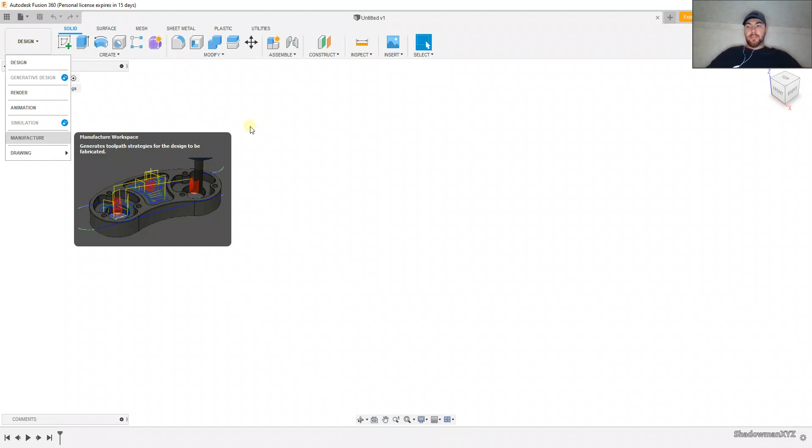If you have no experience whatsoever with Fusion, watch the other tutorials and then come back and start here on the third. So the first two videos we discussed designs, sketches, renders, and drawings, and now we're going to discuss manufacture. So in order to manufacture a part, we first need a part. So let's make a part real quick.

Sketch, top, look down at it. If you don't like the color here, I think we discussed this in the last video, you can change it in environment, change the color. That's better for you. I'm going to go ahead and set it back to photo booth. Okay, we're going to hit C for circle. We're going to draw a part real quick.

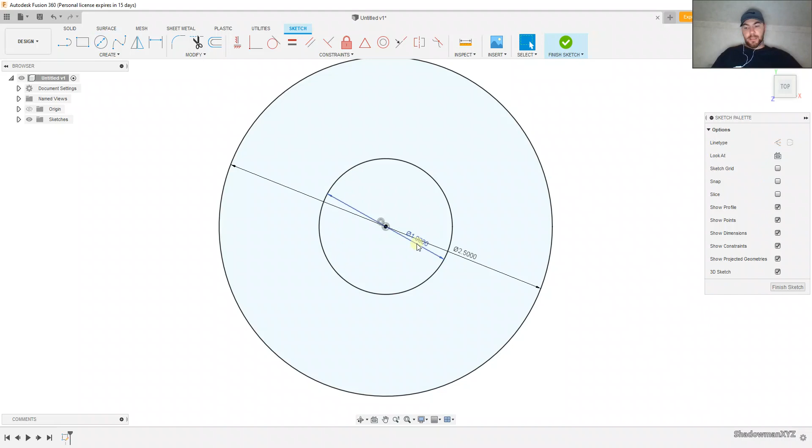So let's say 1 inch. Okay, and then let's make that 2.5 inches. Okay, we're going to make another circle in the middle of it. We're going to call that 1 inch. Okay, and then another circle in the middle of that. We're going to call that 0.25. Okay, and then another circle, which is going to be the bolt circle. And we'll set it at 1.750.

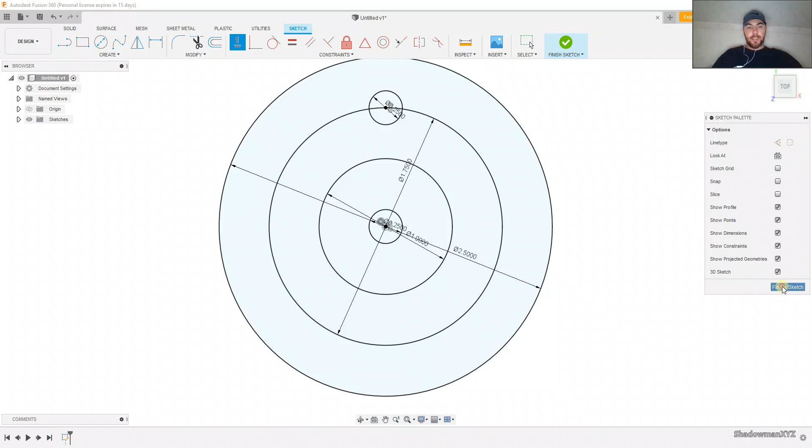Looking good. We're going to create a circle up here. It's going to be 1/4 inch. Okay, we're going to constrain it here. Vertical. Okay, looking great. So we have our part done now. Now let's do some extrude.

Q for extrude. I'm going to touch every single surface except for the center. We're going to leave the center an open bore. We're going to pull this up by 0.125. Okay, a little disc. Turn the body off. Turn the sketches on. Okay, and we're going to extrude everything else up with it. Q for extrude. Except the middle bore. Turn the body back on. We're going to go 0.25.

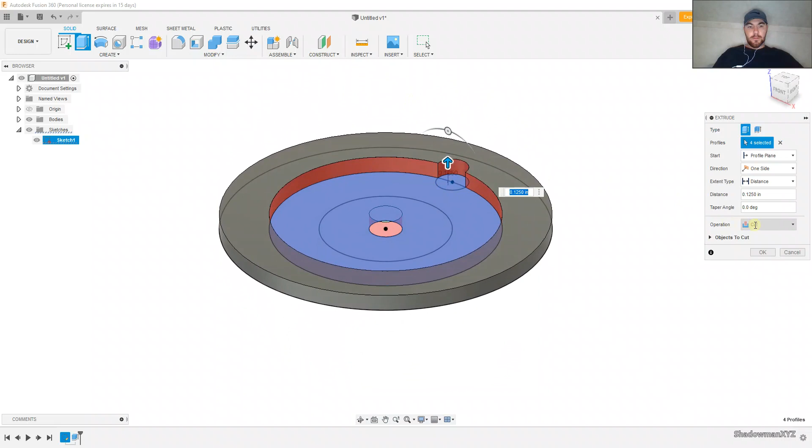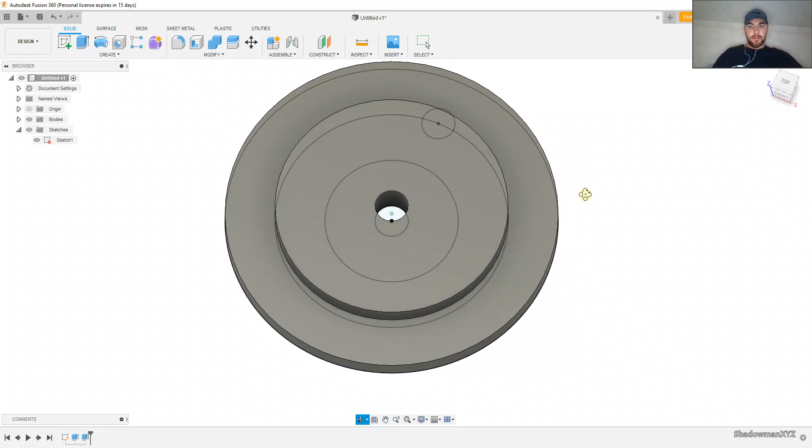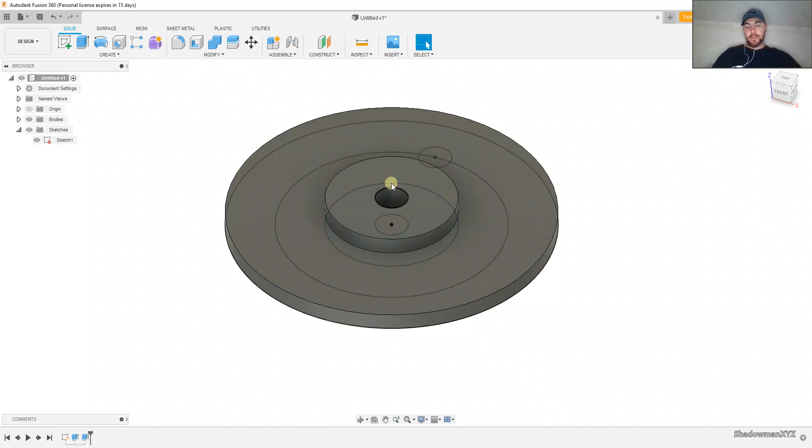Okay. And you know what? We're actually going to turn join, oh 0.25. Okay. Let's see. Let's edit that. Let's not touch that, or let's turn the body off, touch this hub, turn it back on, pull it up to 1/4 inch, enter. Looking good. We got a hub and a flange.

Let's make this a through hole here. So turn that body off. Grab the circle here. Turn the body back on. Pull it through where it cuts. Hit OK. Now we have a nice little part here. Turn the sketches off. Okay, let's create a bolt pattern.

We can do that by going to create, pattern, circular pattern. Click on the part. Choose the axis. We're going to go off the middle. 6 is fine. Hit OK. So we have ourselves a little flanged bolt circle hubbed part. Let's make it now. So to make it, let's save it. Okay, let's go to the workspace and change it to manufacturing.

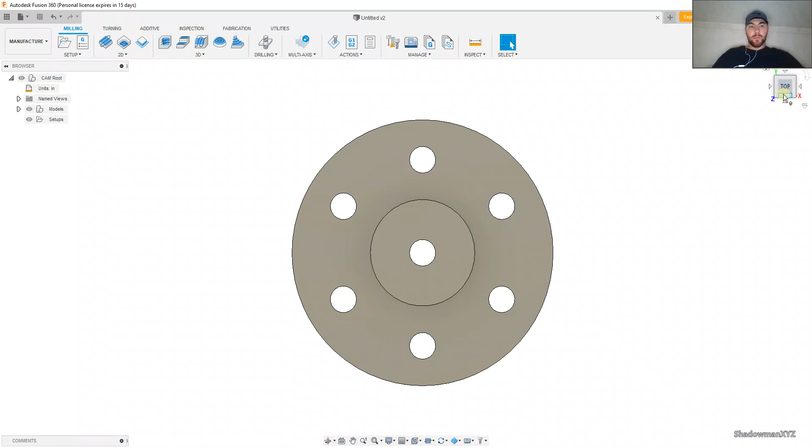And sorry if I moved a little fast just a second ago. That's stuff that we've already covered in the other two videos. So if you're getting stressed out, visit the other two videos and practice there. This is for the CAM workspace. This is where we're going to be making toolpaths for this video. Okay. The other two go over the other stuff, the design process, rendering, and drawing.

Today is manufacture. So to manufacture this part, we need material, preferably oversized material that we're going to cut down to this part. So we're going to set up our stock, new setup.

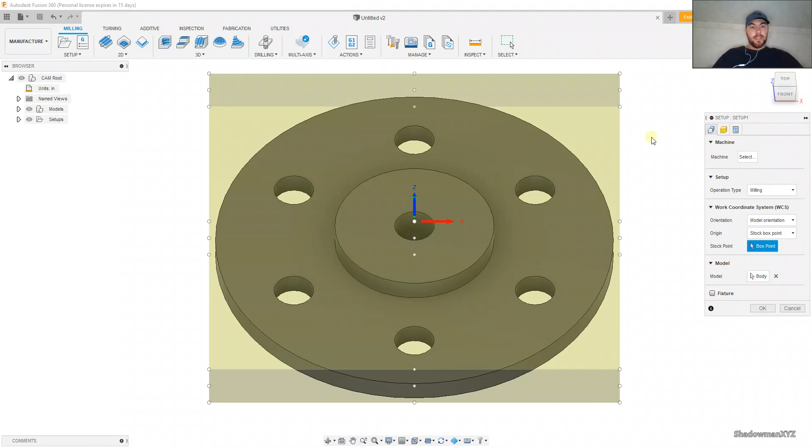Say we got a piece of round bar that came in. We go to stock and tell it that. So we're going to go to mode, and we're going to say relative size cylinder.

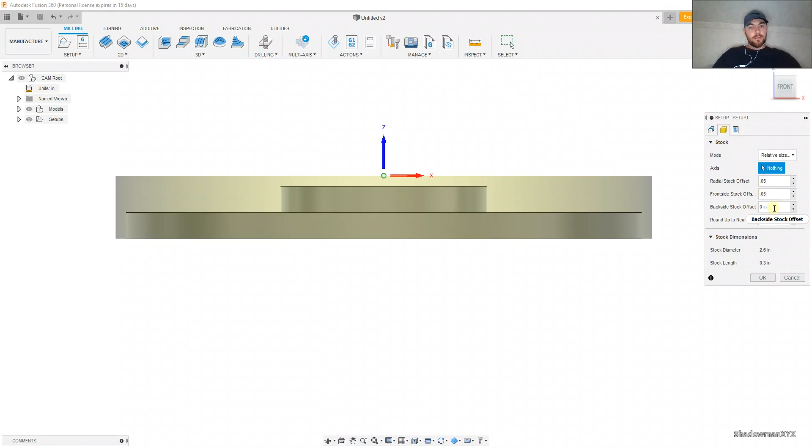Say this round bar we found laying around is a little bigger than our part. Say it's 50 thousandths bigger radially, the top has 50 thousandths extra, and the bottom will be left long, like a quarter inch. So plenty of material to remove in order to pull this part out of that stock.

Okay, we're going to go back. If I was going to machine this, I'd throw it in a vise on a CNC mill and probe the OD, find center of the OD, and set my WCS in the center like it's shown. So in order to do that, we're going to set our model orientation and our stock point. I like the way it's already oriented. You can change that if you wanted to, wherever you wanted, but for this it's perfect for the center.

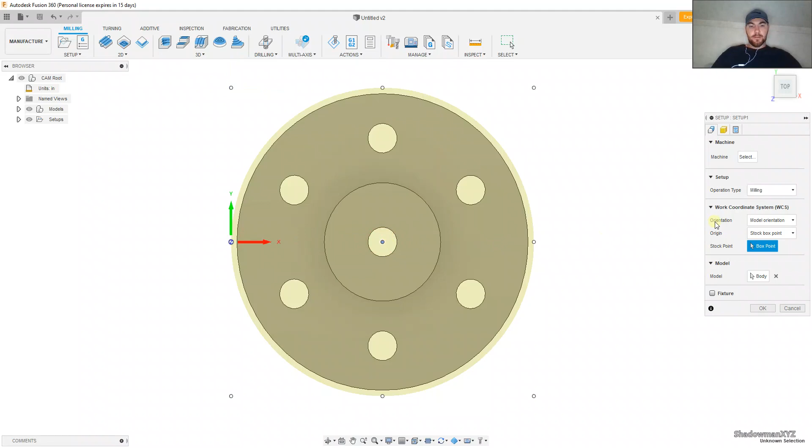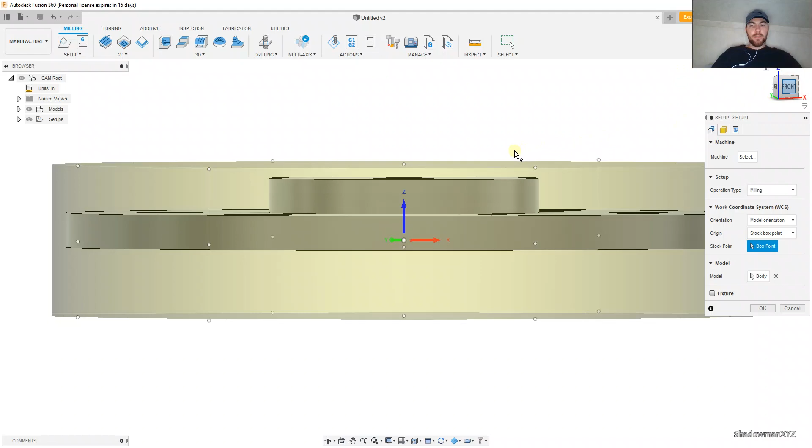Go back to center. Now it's critical that you put your stock, your work coordinate system, in the right spot. If not, you're going to have to program around it. So to save a hassle, I like to put it at the top of the stock, right at the center top, and set your coordinates the way your machine is running: Y positive, X positive, and then Z positive.

Once you do that, that's essentially it on setting your stock. You can play around with this stuff, not necessary. We are done, hit OK.

We are ready to start making toolpaths. The way toolpaths are made is how that machine out there on the floor runs around cutting your parts for you. You got this smart guy in the office making these toolpaths.

He's making a bunch of money or whatever. You want to be like him, you want to grow up and be a big guy like him. This is how you do it, guys. This is where you start. This is for the beginners. This ain't for you know-it-alls out there already, you're already there.

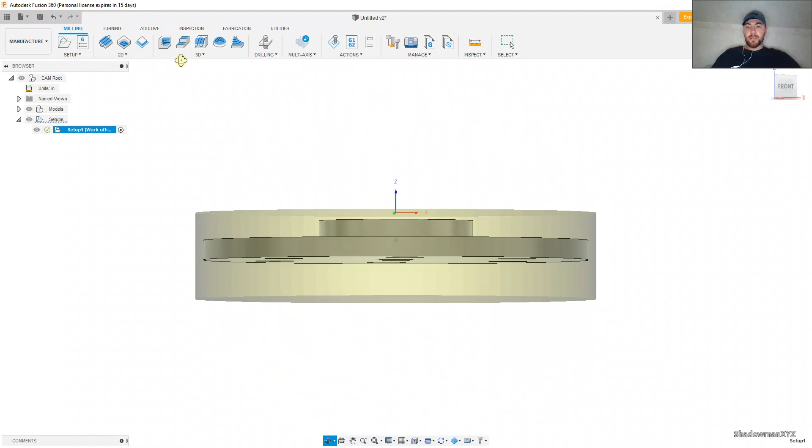So here we are, back to the subject. Let's create toolpaths. This part's a little long on top, so I'm going to do this in 2 ops. I want to do everything on this side, flip it over, grab it, and just face the bottom, and we're done. Very, very simple part.

First thing we may want to do is maybe just shave the top off, like a facing operation. So we're going to grab a face mill or an end mill, some kind of tool. Just for the sake of it, we'll grab a little face mill, way overkill here, a 2-inch face mill. We're going to mill the top of it all.

Okay, I'm going to explain the tabs here. The first tab, and this is the same across the board for anything we're doing, everything here, there's 5 tabs. Once you learn these 5 tabs, you got it made. So the first tab is your feeds and speeds and your tools.

So select your tool, go into their library. I love their library, very good data in here. Choose the tool you're going to use. I'm going to take the top off with a face mill. Come down to Fusion Library, click on it, and they'll give you a list of tools. If you cannot find one that works for you, you can always make one right here at the plus, create your own tool. We'll get into that later. That's a little more advanced, but it's very simple to use. Thank you, Fusion, for making it so nice and simple. We're going to exit out of that, and for the time being, we're just going to use what I had.

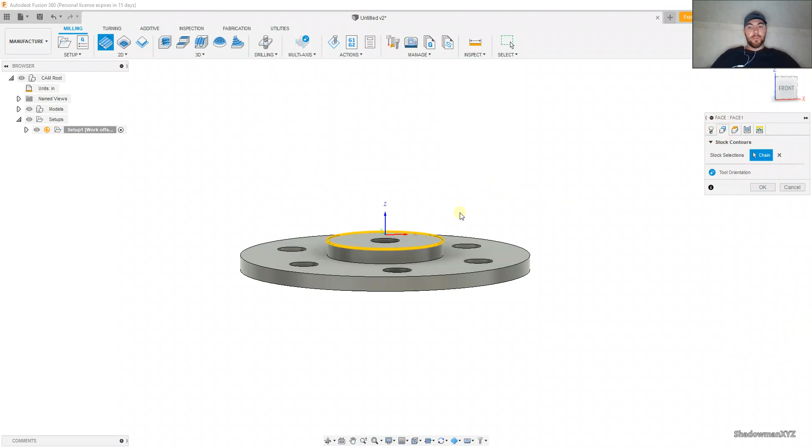What are you machining? First one is the tool and how fast you're going to use the tool. Second one is what you're going to use the tool for. The third one is how far you're going to take the tool. So we're just going to say model top. So the tool is just going to cut down to the model top. It's going to remove the stock. So that's your heights tab, tab 3.

The fourth tab is your passes tab. So this is how you're going to go about the cut. So the direction of the cut, extensions if you want to go off the part a little further, offset if you want to make it a wider cut, step over, directions, all that stuff, multiple depths.

We're just taking like 40 thou, 50 thou off. We can do it all in one pass. Very, not even needed. We can do it with another tool, but for the video, we'll just face mill it off. Full depth of cut. Linking tab.

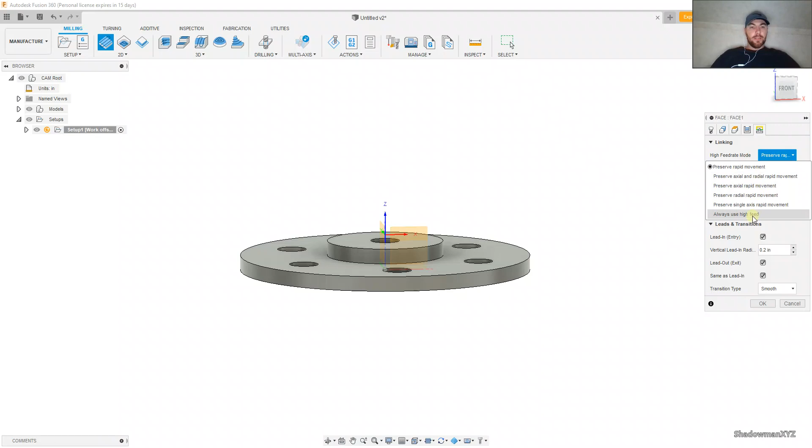This is where you can change certain things. You can always use high feed instead of preserving rapid movements. They will set it at G0s, or you can use one thing I like about Fusion: hover over anything, just take your mouse and hover over it, and it will explain it all to you.

So if I'm in preserve rapid movement, what I'm in now, all movements are preserved. Okay, and if I go to the bottom one, always use high feed outputs, it's going to output all your rapid movements as high feed moves, G01 instead of rapid G0s. So instead of the code on your screen that you're going to see out on the machine saying 'go here, go there' in full rapid, you can actually use high feed and then set your high feed to whatever you want.

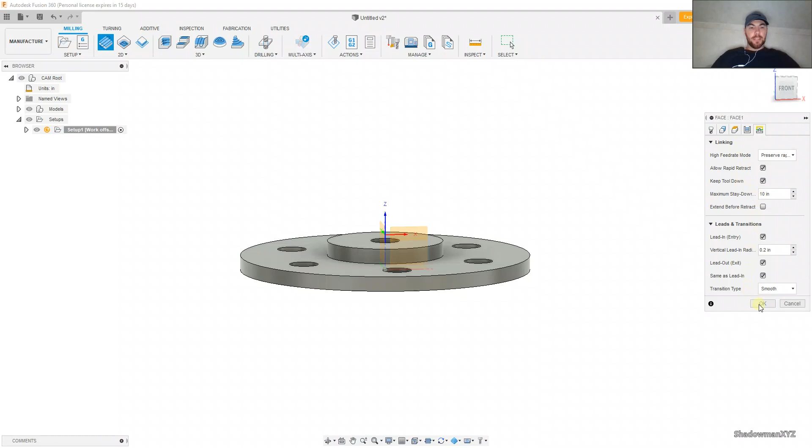0 to maximum machine capability. So I'm just going to use rapid G0. Works great for me. And then we're going to hit OK, and we've got it. I mean, it's as simple as that. Simple facing operation. So we're going to do simulation, start, boom.

We mowed the top of the part, and you see how it left some stock there. If we don't want that stock there, we can change that by right clicking our operation, edit, and go to passes. We can do stock offset and just increase that. So let's go 1/4 inch.

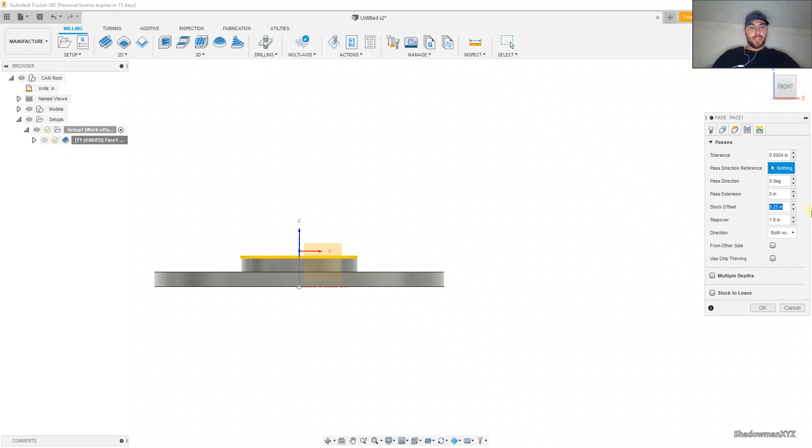So that's going to start it off 1/4 inch off the side here, not radially. So let's play around with this a little bit. So let's go to passes. Let's increase this start point out here, let's just put it at 1 inch, and we're going to see what it does. You notice the tool has moved out now away from the part, so you're not rapiding it down into the part, crushing your inserts.

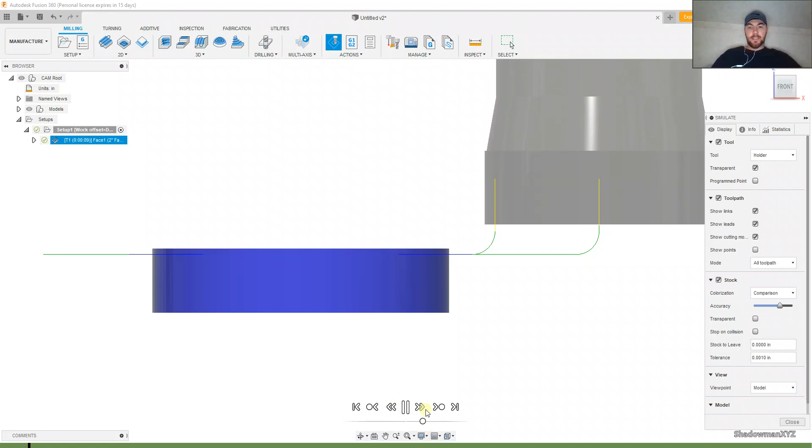You're actually going to come down away from the part and feed into it, which is what we want. So it's going to come down, it's going to cut into the part. Perfect. Okie dokie. Looking good. I cleaned it all up nice and neat. Now we can move on to the next step.

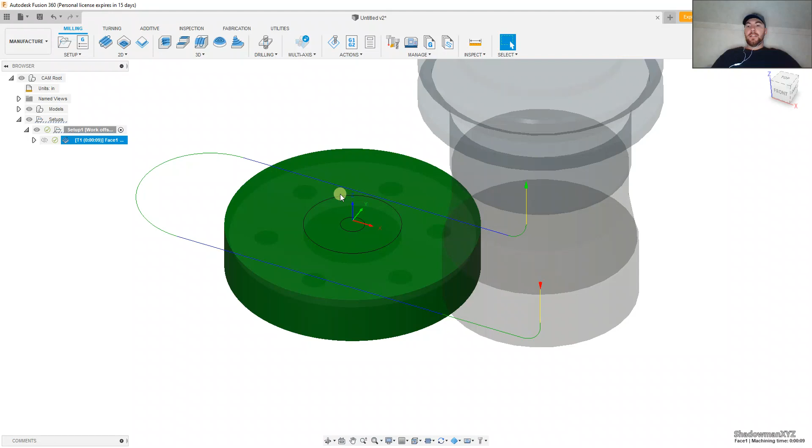Okay, the next step, since we faced it, let's go ahead and mill this out, this hub. So in order to do that, let's go ahead and grab a 2D contour with, let's change the tool. We could use this tool, but let's just change it to like an end mill.

So like a flat end mill, a small one. I don't know, like 1/2 inch or something. Might be a little overkill. Let's see. Perfect. Okay, let's change our feeds and speeds. You can change it right now. It's on aluminum. If this is a plastic part, we can just use plastic finishing. Works great for me. It's cutting very fast.

You can slow it down. 0.025. 40. Change your surface speed. 500.

That's going to slow your feed rate way down. If it's plastic, I cut plastic all the time at over 100 inches a minute.

But for the video, we'll do this geometry. So you're going to select what you are going to machine. In this case, we are going to machine this area here. So I'm just going to click on it, set my height to selection, and then click the face. So I know that tool is going to come down to that face and machine around.

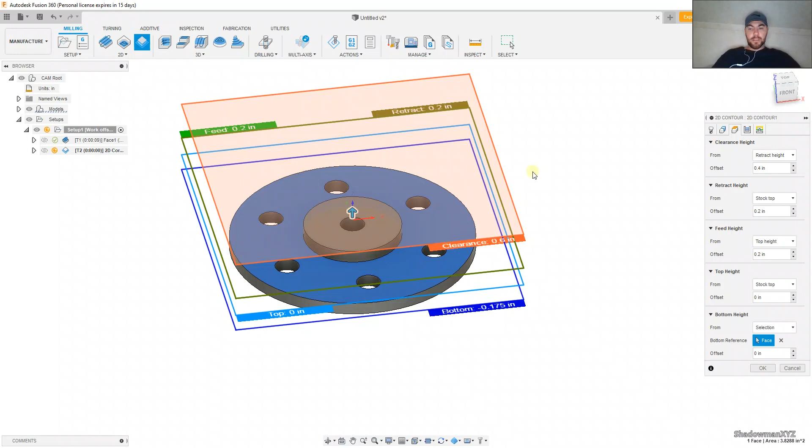I don't want to leave any stock. I want it to take it all off, and I'm going to put my compensation type on wear. So what wear does, it outputs a G41/42 on your last circular move there when it's coming around to make your finish pass, and you can change the value of your tool.

So in the D, it's your D tool, D number, which is your diameter offset. So if you're using a 1/2 inch tool and you ran this part and it's still too big, you can offset your D in your machine to go a little further. So a 1/2 inch end mill, maybe it's a little undersized, maybe it's .499, didn't cut your hub to tolerance. You can cheat the D by putting in a negative number in your wear, like a thou, and then boom, you got it.

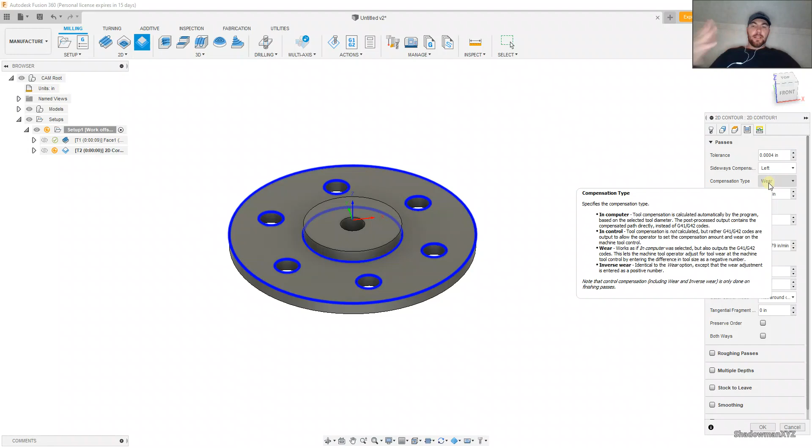So everything else is cool, we're just going to hit OK. It's really that easy, guys. So hit simulate, hit play. Okay, see how it machined the inside and outside. We don't like that, that's going to destroy the part.

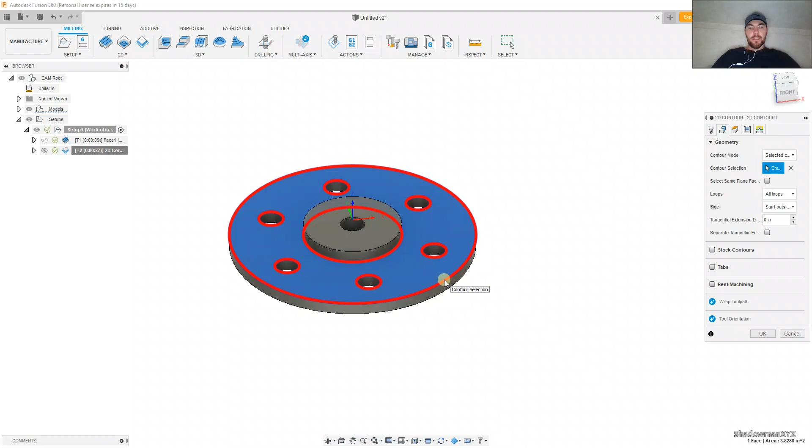So let's right click on that operation again, edit, go to geometry, and let's choose what we're doing here. We're going to do outer contours. Let's see what that does. Ta-da, play.

If we still don't like it, okay, we can right click, edit, cancel that contour selection, and let's just grab - okay, that's outside, and that's outside. Let's grab those two and hit start. Alright, simulate, start. Looking good.

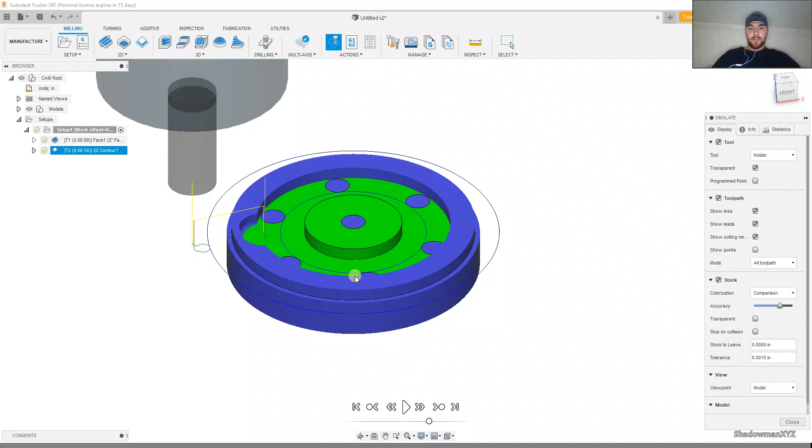Looking good. Okay, looks like we missed some stuff there, so we can go back. As a matter of fact, I tell you what, let's just delete that and let's use 2D Pocket. It's so much easier.

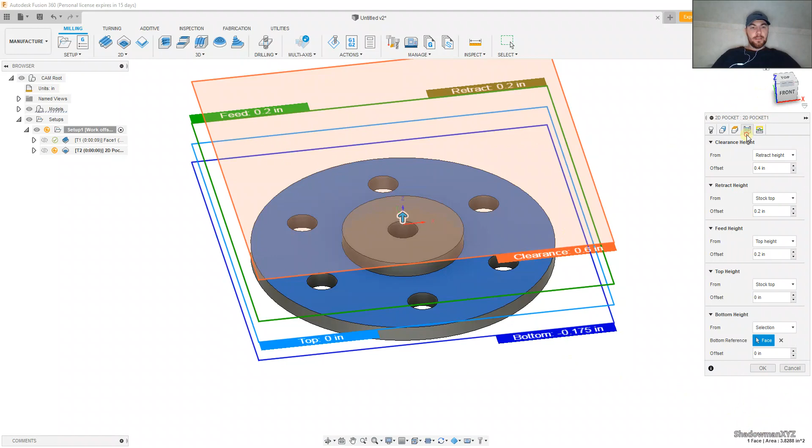Choose our end mill again, flat end mill, 1/2 inch. Watch the difference here, you saw what I did there. I'm going to click this face, go to my heights, click that face again, make sure no offsets. Click them all. Hit OK.

Simulate, start. It's going to spiral down. We can change that. It's going to machine all that to perfection. Look at that, beautiful, I like it.

So you notice how it did that? We can take that out of there. Watch this, you can change all this stuff. So we can go to passes. We can do multiple depths if we want. We can do step overs, we can do like 0.25, it's going to be nice. We can do our lead in, can be plunge outside of stock. Hit OK.

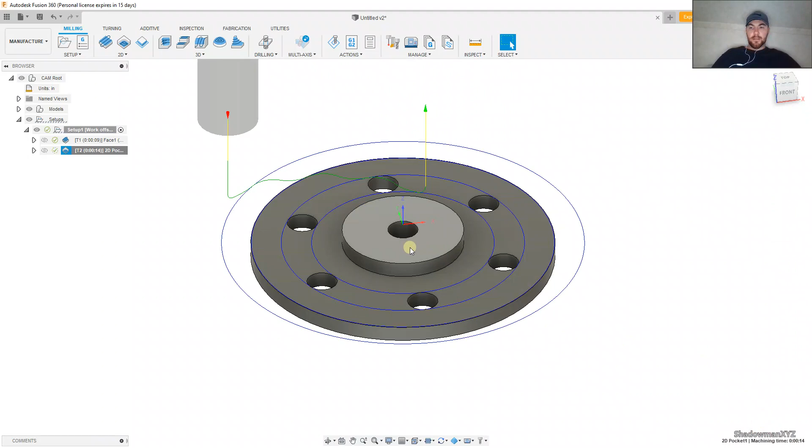Now it's going to come in from the outside, machine our part. It's going to be great. As you can see, it's coming in, it's machining our part to perfection. Looking marvelous, boom, done. Alright, we have that operation.

We got the face, and you can rename this stuff. That's face 1, you can just say face top, part with - what is it, a 2-inch face mill. But you can put all the information you want. The more the better, right? The guys out on the floor, they got more things to go off of.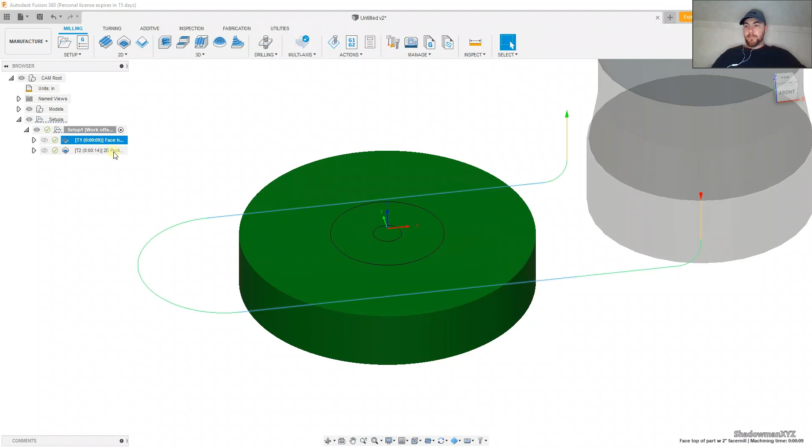Pocket, so we can contour hub.

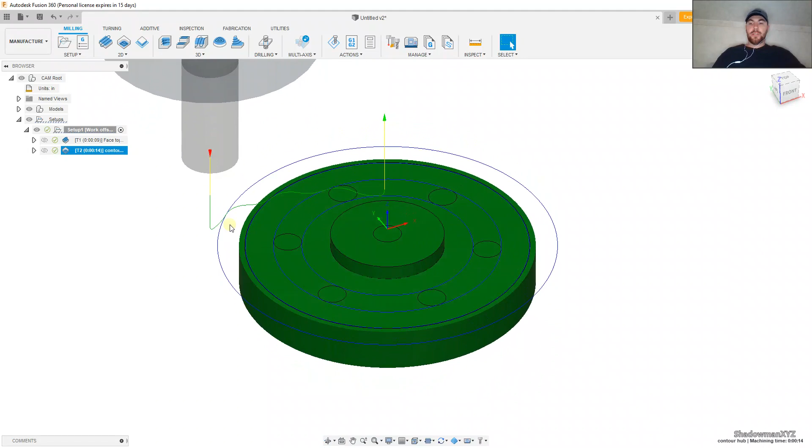Okay, now we're going to do the drill. So we've done the outside, the top. We need to machine the complete outside. So let's go back to 2D contour, and that's where we're going to do the bottom out here. Let's go to the outside, same tool. We're going to lower the height to the bottom of the part.

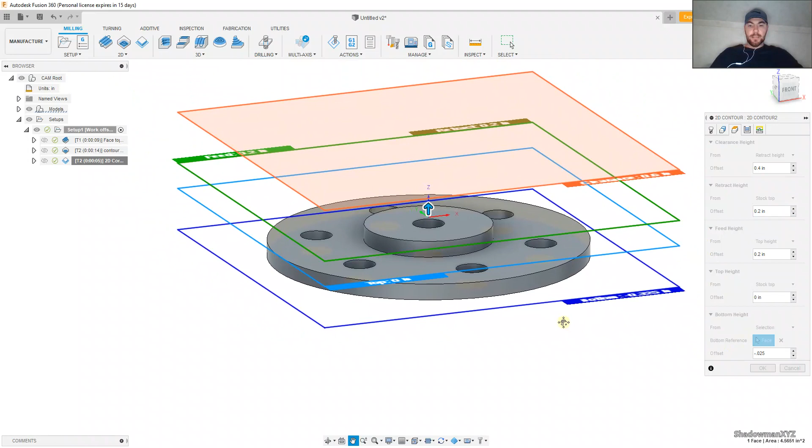Alright, so it's going to machine down to the bottom of the part. What we're actually going to do is go a little further than bottom. So we're going to machine a little past bottom, minus 0.025, so 25 thousandths past. That way when we flip our part and face it, we're done.

So generate that. Let's replay all that we've done so far. Simulate. Make it a little transparent so you can see what's going on. Contouring real nice and neat.

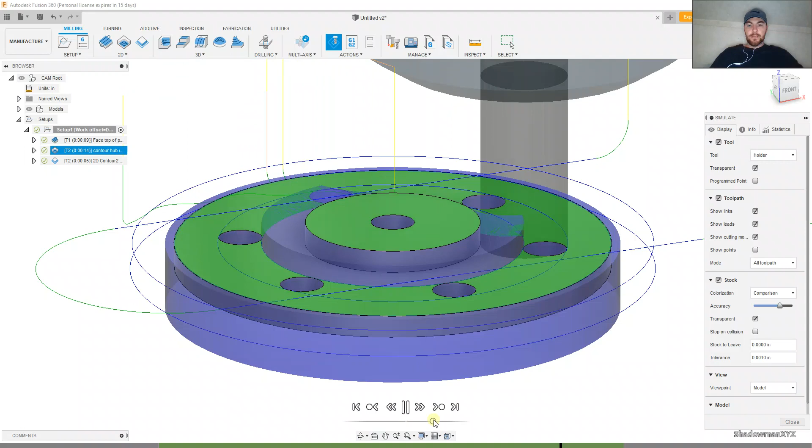Looking good. Alright, let's take a look at what happened. So all this here is extra material that when we flip the part and relocate, we shave it off with a face mill, and this part is done once we do this bolt circle on top. So all the hard stuff is done.

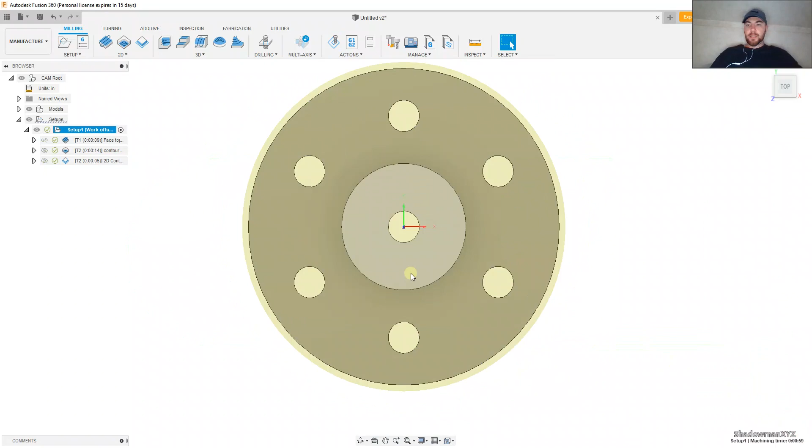Let's wrap this up. In order to wrap it up, we're going to drill these holes. I don't remember what size these holes were. That's not a problem. Go right here to inspect, measure, click on that hole. That is a 1/4 inch diameter hole.

So we can send a 1/4 inch drill in there. Perfect. What's this center hole here? That is also a 1/4 inch. So we need one tool. If we're using carbide, we don't need to center drill. If we're using high-speed steel, we can go ahead and throw a center drill in.

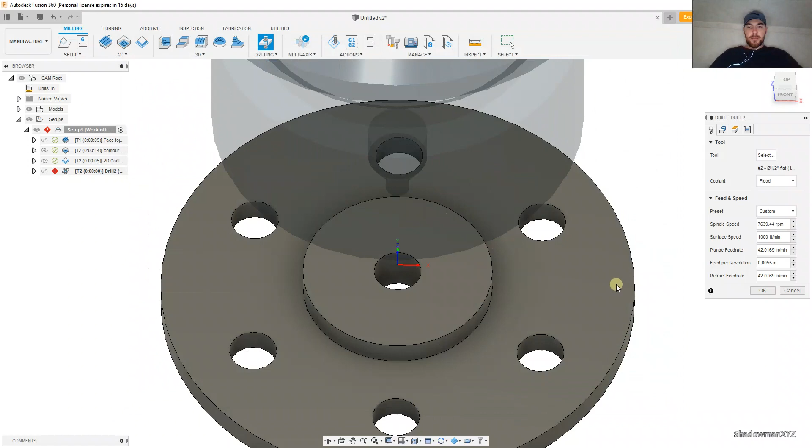So let's do that. Let's go the long way here. Let's do a center drill. I'm not going to get technical with it. Let's just do 5/16. Make sure it's long enough. Yeah, looks good.

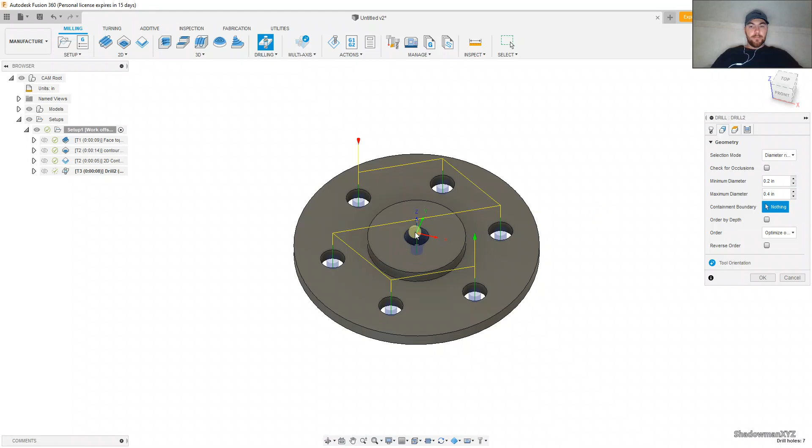Geometry, I'm just going to grab all the holes. You can do one by one, or diameter range, and then whichever one you grab, it will do it for you. So I'm not going to do that. I'm going to do selected faces, because of that middle one. Later in the heights tab it'll bite me.

So on drills there's only 4 tabs. You got your tool, feeds and speeds, geometry - that's what you're drilling, your heights, and then your type of cycle: tapping, boring, reaming, drilling, peck, all that stuff.

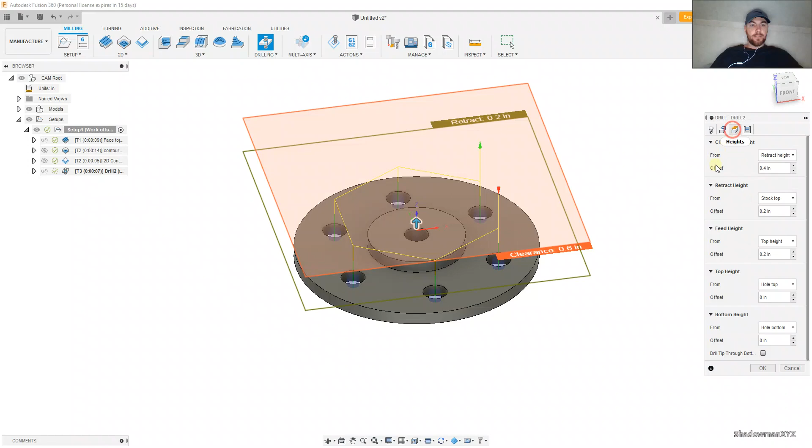So let's go to selection. We're going to go to the top of the part, and we are going to go like minus 0.150. Okay, so it's going to throw in a little included chamfer.

Center the drill up. We're just going to drill rapid. Looking okay. See what happens. We can go a lot further. Okay, but for what we're doing, this is going to work.

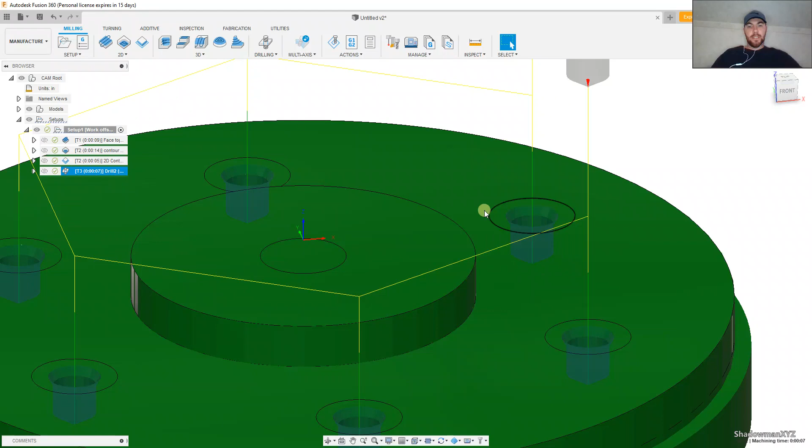So when you're out at the machine, your operator can actually move this tool down to the desired height. So right now it's at 150. He can move it down until the tool actually creates a chamfer here. So we center drill it, and then drill it through, and then there'll be a chamfer that remains because we took the center drill a little further. But we won't get too much into that.

So now we're going to go ahead and finish drilling it. We're going to take a tool, 1/4 inch drill. So find your drill, drill library. Plenty of stuff to choose from. I love that about Fusion.

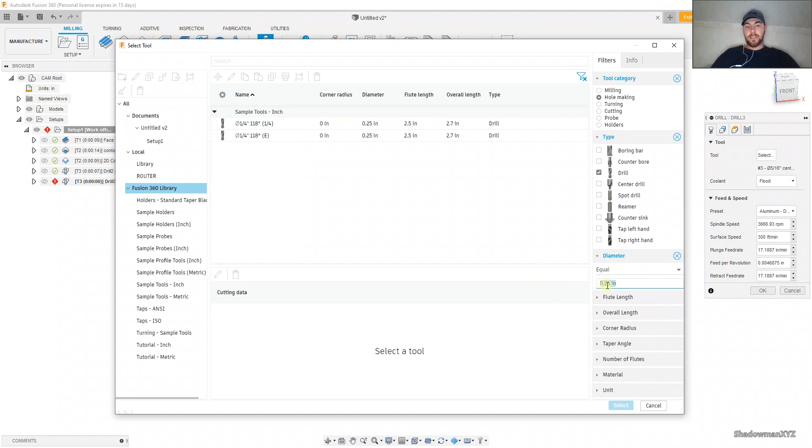You don't want to scroll through it. Click right here at diameter, equal, and you can go fractional or decimal. So 1/4 for 1/4 inch. Click off the screen. There it is. Or like they converted it there, you can just type in 0.25. So we're going to go ahead and choose this one.

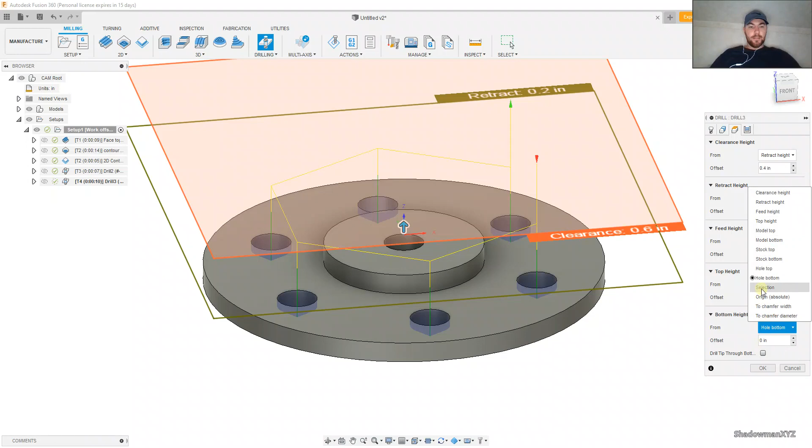Select our material, which is, I guess, plastics. Choose our holes. We're going to do every one of these. Okay, our heights are going to be through the part. So click the bottom, and then drill tip through bottom. Yes, why not? Push it all the way through.

Okay, see that? How the drill tip went through the bottom? Let's go a little further. Minus 0.125 - whoop, doesn't need to be negative. Okay, 0.125. So we know for sure that drill is going to pass completely through that part, giving us a good part.

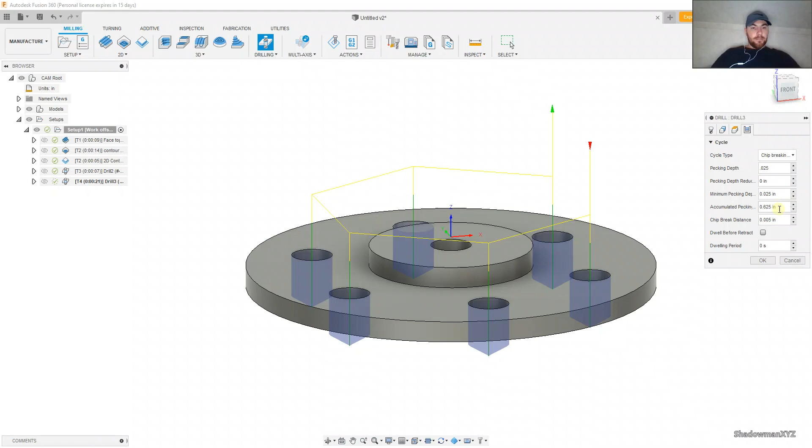And you don't have to, but just for sake of showing you, I'm going to show you. There's drilling, counterboring, all that. Let's do some chip breaking. So we're going to send this down at a crazy small amount, like 25, just for whatever reason. That's it. So let's watch that. I'll show you what that does.

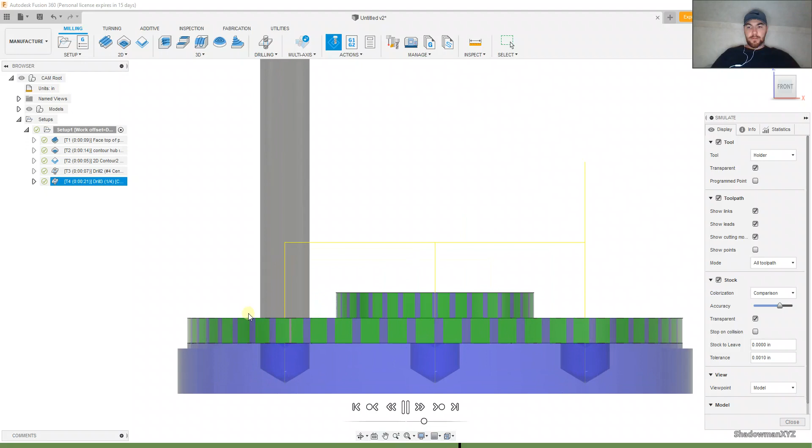Play. You can actually watch it chip break. It's hard to see, it's going so fast. See if I can get to the meat. See it?

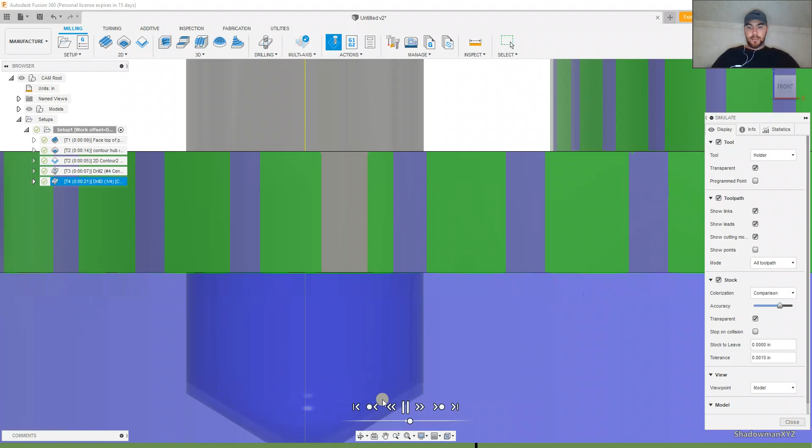Slow it down a little further. See it jumping? It's breaking that chip. Partial retract. So that looks great. Now we need to do the middle.

So the middle, we could actually do the middle along with that. Why not? So we're going to do, no, we're going to make that a separate operation because of the height of that. I don't want my feed to start up here on all these holes. Save time, we go to drilling. It's already chose the tool.

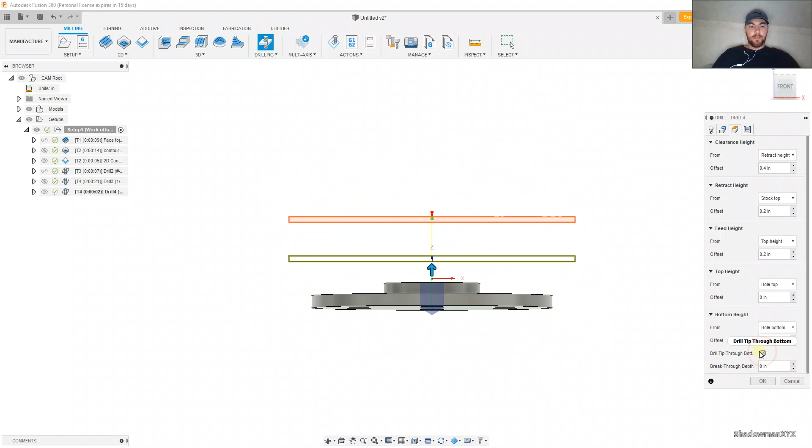We're just going to choose the geometry, which is the center, and then the height. Hole bottom works for me because it's at the bottom of the hole. Just tell it to go drill tip through the bottom and specify how much. We're going to go 125 thousandths again, 1/8 inch. Looking beautiful. We'll do a peck. Okay, perfect. Post. Okay, so we got this done.

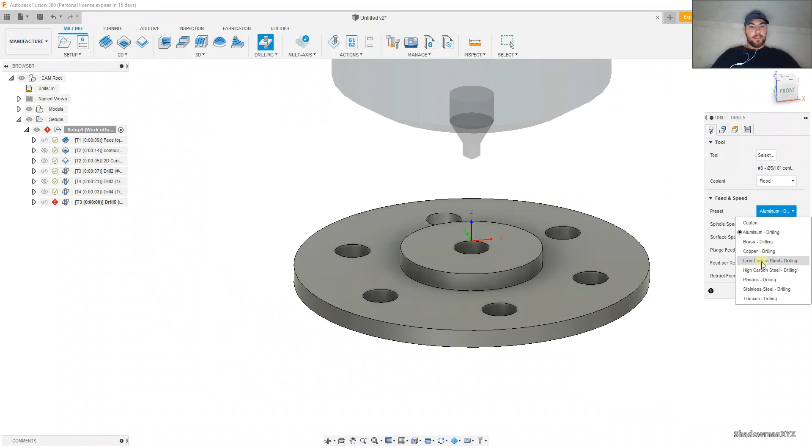So one thing that we've missed is we need to center drill this one too, because we center drilled these, but we didn't do this one. So we can actually go back. So let's go to drill, select, center drill. We'll just grab it there. It's already there. Choose your material, choose your geometry, choose your height. Always make sure to double check this stuff.

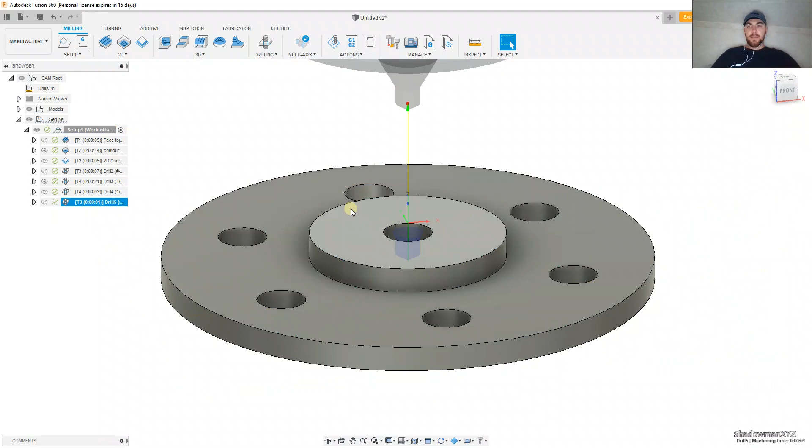Minus 0.15. That's shallow. It's okay. A little senseless here because it's drilling after the hole's already there. So what I like about Fusion, you can actually grab this process, find where that drill is, and put it before it. So move it up and drop it. There. Now that center drill is before the drill.

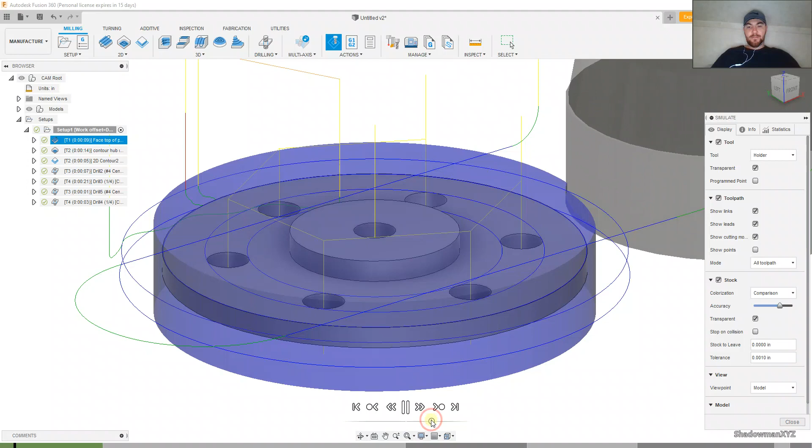Now let's go ahead and simulate this whole thing. Because we're done, folks. It's that easy. So simulate, and we now have a CNC program. Hit start, speed it up a little bit, and you are now a programmer. Speed it up, mow it down, looking beautiful, no red, interpolating, contour in there, running around, center drill, drill, center drill, drill.

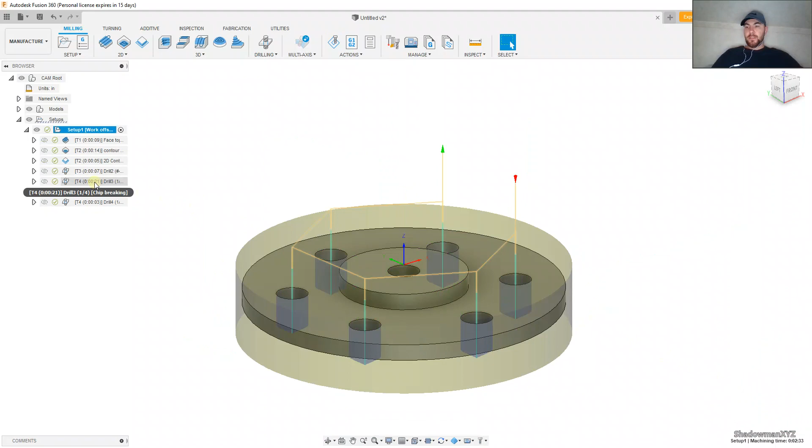Oh, one thing, I saw that to save time there. Did you see it? Did a tool change? It center drilled these and then drilled them. And then tool change, center drill, drill. Let's go ahead and use that center drill all at once. So this center drill should be before that. Somewhere in here. Let's see. Drag this above there. So we got center drill, drill, drill. Perfect order of operations.

Okay, simulate again. Make sure it looks as good as it sounds. Perfect. Center drill, drill, drill. We're done. We're ready for op 2. Okay, close that. Let's flip this dude over and do op 2 now. So we're gonna close this off because we don't even want to look at it anymore.

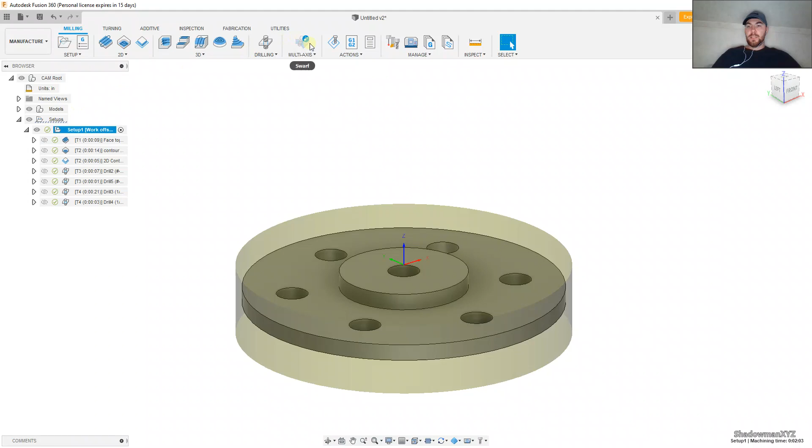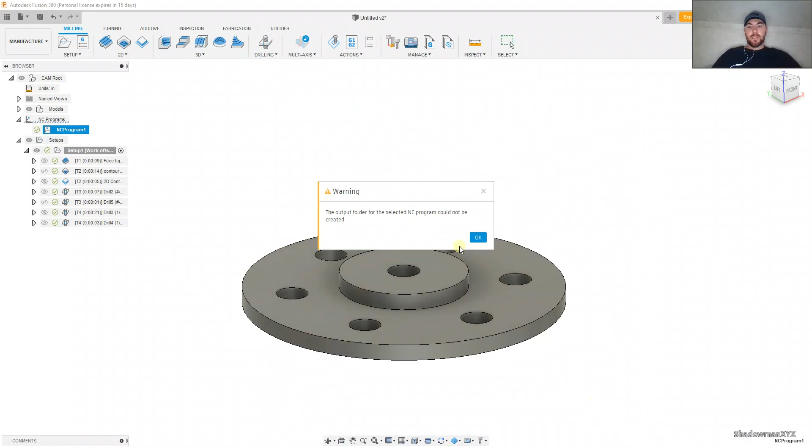To post it, you can go here, click post process, and choose what you're doing here. And so just number your program and hit post. Right now I got the trial version, so it's only going to let me do one tool. It's not going to let me do this whole post. But if you hit post, it'll take you to a code generator and a post, and it will output your code and let you edit your code and stuff. I'll show you right here.

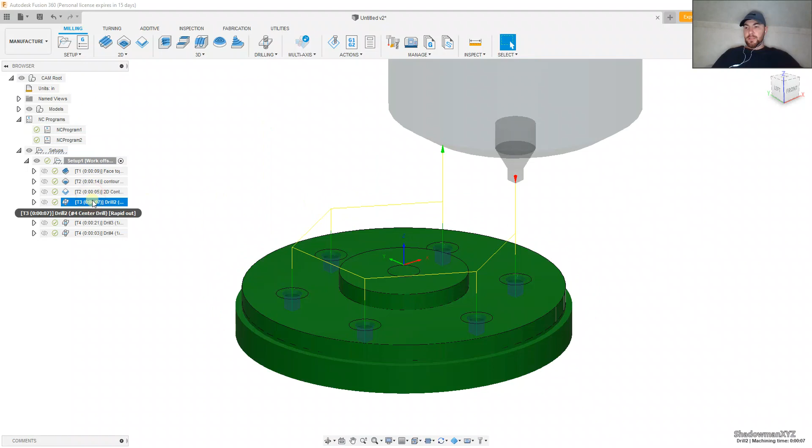So let's do like this center drill. Just click on one operation, right click, post process, hit post. Oh, come on, buddy. Let's do just that one process. Open in C, 1001. We're going to do just here, post. Yes. Now it's going to go ahead and post the center drill operation.

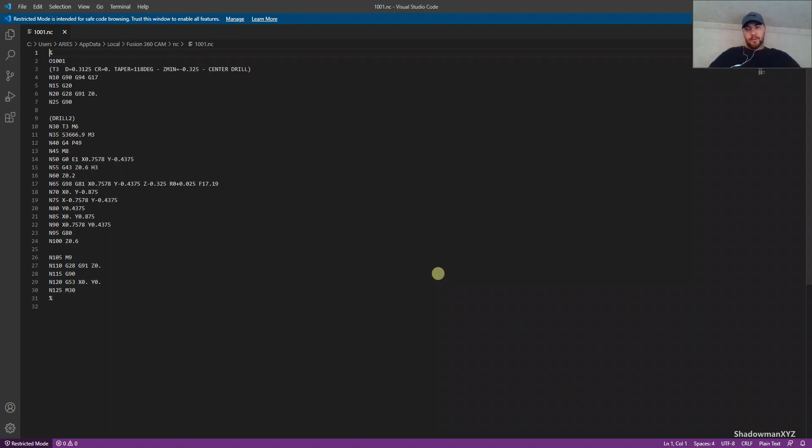Make sure you're in this. You want to make sure your tool heights and all that stuff is correct. Your tool number is correct. That way, when the operator gets it, he's not having to fix all that, or maybe he needs to. Maybe he's wanting to put the tool in a different pocket or something. So here we have drill 2. It's going to use tool 3, M6 tool change. There's your spindle RPM, your clockwise rotation.

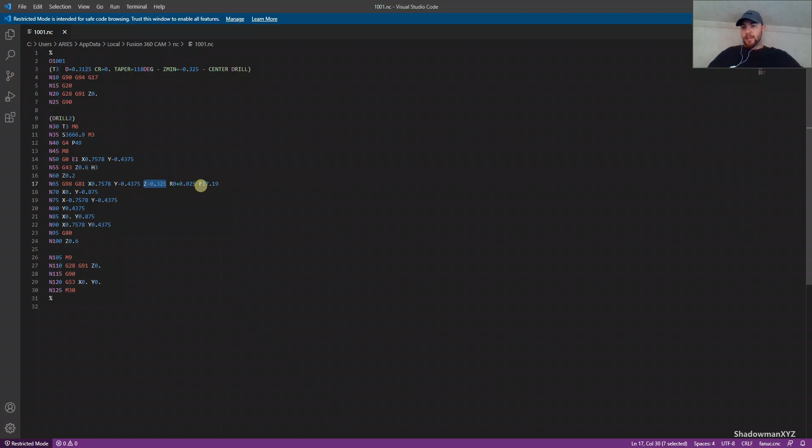This is a Fadal CNC post, so they use E numbers. Other machines use G54, 55, 56, 57. Fadals use E's. The newer ones understand 54 offsets. So the main important thing here is make sure your work offset is correct. Your tool number is the same as your H number for center drills. D doesn't matter because we're not doing wears. They can adjust their height here in the program in their Z, retract, their feeds. When the machine gets done, it can go home.

A lot of times, like on this one, I would edit this to G28. Let's use some caps here. G28. So we're going to go machine home X, Y, and Z 0.0. I like it. It looks good. I would post this and not be afraid at all. So that's how you use that. It's really nice, easy to use.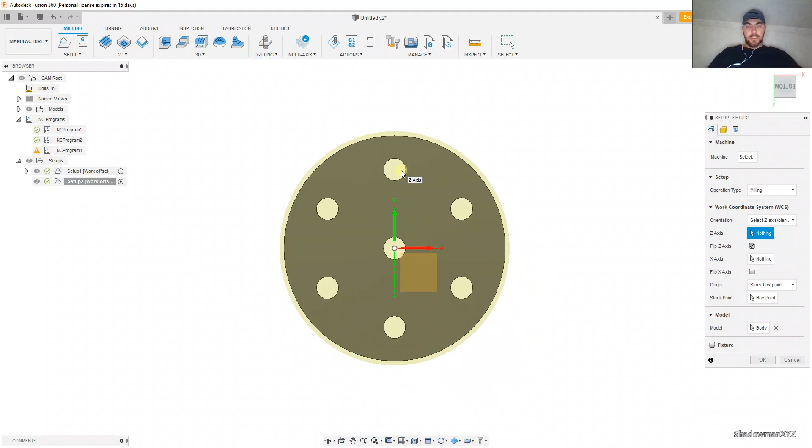Okay, so all we're doing is a facing operation. We don't even need to make a program. If it's a one-off part, you just stick it in there and face it to length. But in this case, we're going to run a billion, let's say. So let's go ahead and make a program. So at the top of our stock, coordinate looks good. We're going to stick it in the machine. We're going to locate the center of the part right here. We're going to hit OK here.

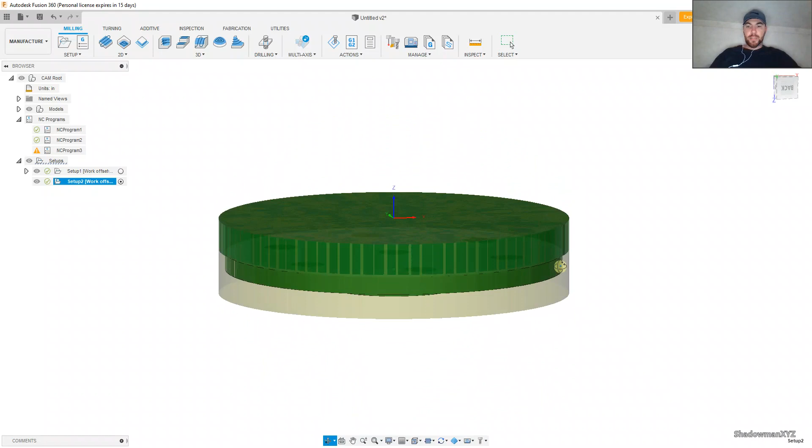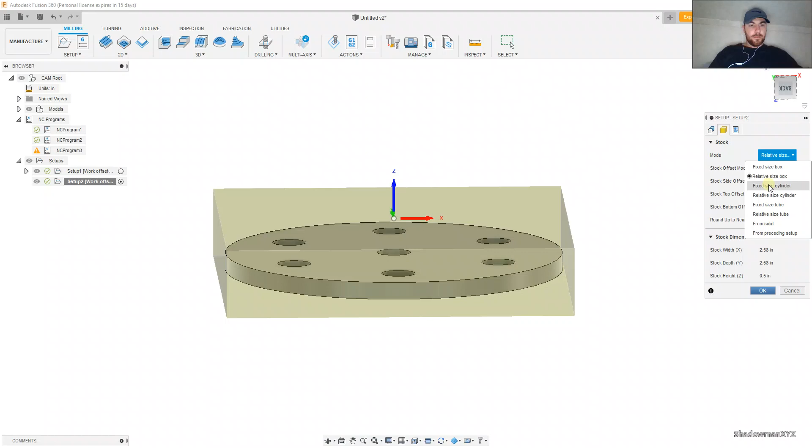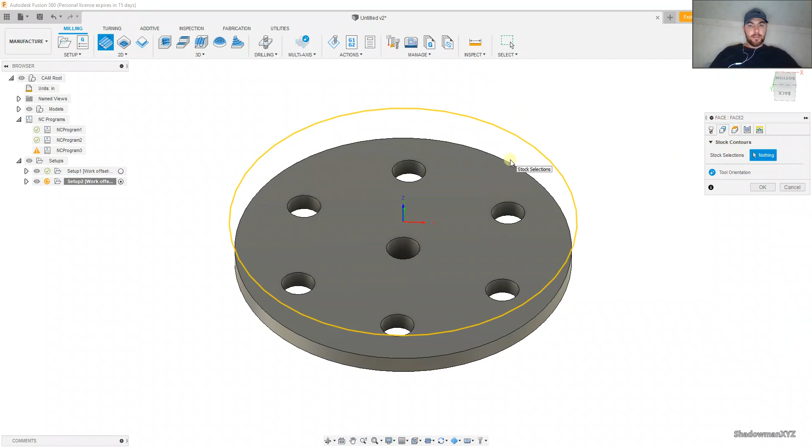Okay, so we just need to chop that off. That's it. We're going to hit OK. We're ready to roll. Just grab our face mill and be done. So facing operation up there. Your tool, just grab that face mill again. Right here. It's already laying there for you. The next tab, geometry, just touch your face. Model top, because that's how far you're going down.

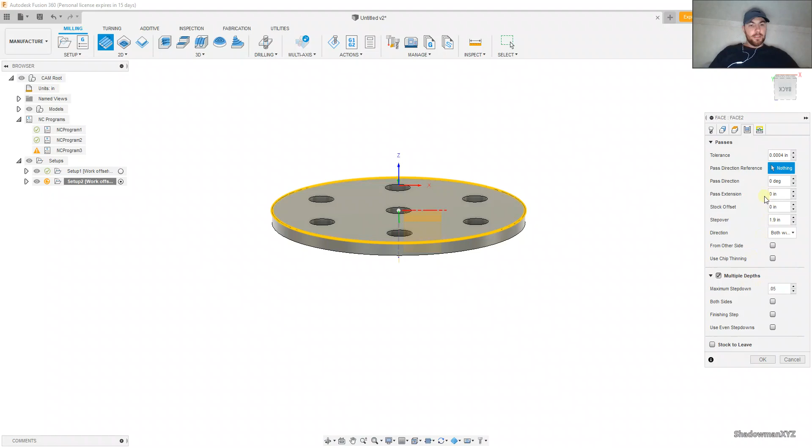Your passes, if you don't feel comfortable with taking a 1/4 inch cut with that face mill, then you can cut it down. I personally would for this plastic material, but if you don't want to, you can change it here, like we'll say 50 thou. Passes, that's it. So let's hit OK, and you're done. We need to make some offs. Let's see what this looks like. That looks good.

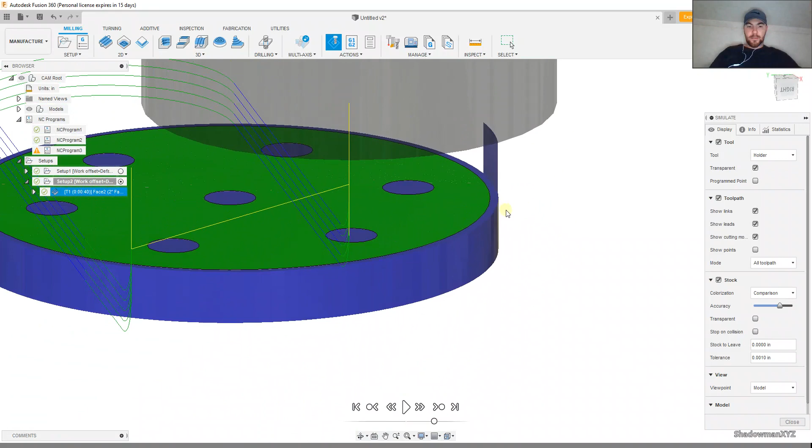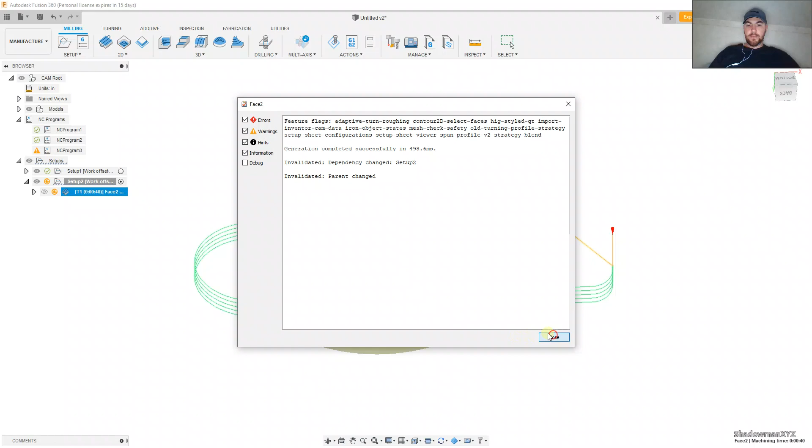Okay, got an issue here. See here, it's saying it's not cutting it all the way off or whatever. Let's fix that. Go to edit, passes. We can do, let's see, pass extension. How's our stock? Let me look at something here. There's so many ways to do this. Let's just increase our radial stock diameter by like 0.1, just for fun. Okay. Regenerate. You just right click up here and hit generate.

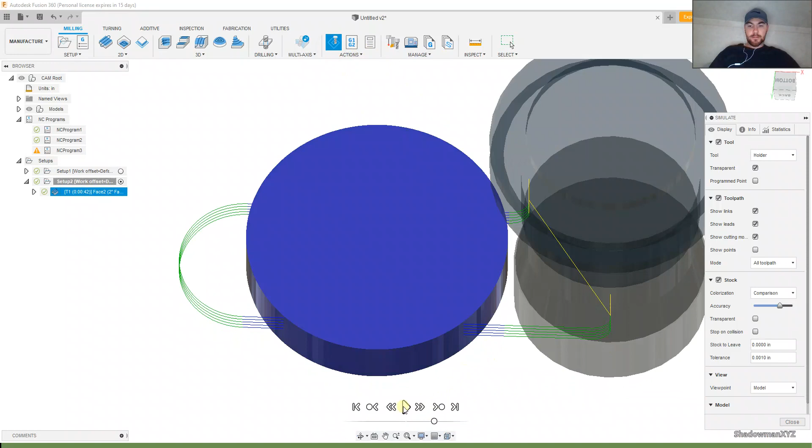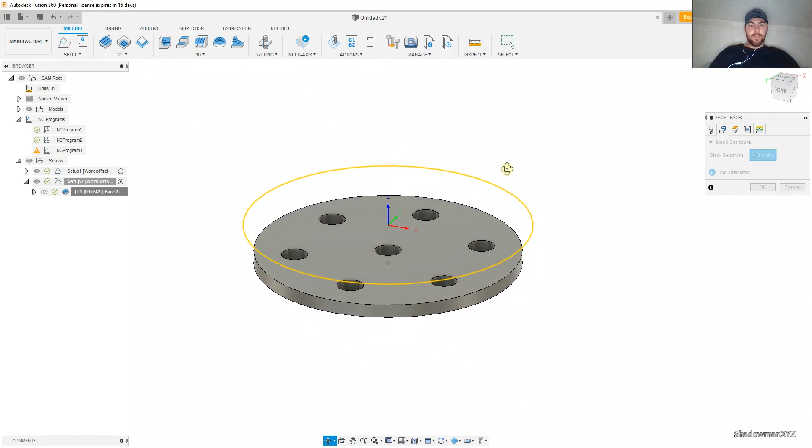Okay, and let's see. Geometry, stock selection? Let me re-grab this. That should be here. Let's see if it let me have it. Yeah, it did. Okay, beautiful. So I didn't even have to click on anything. It just defaulted. It already knows, it's intuitive. Stock selections, I don't have to pick anything. It already knows by what I typed in under my stock. So just hit OK.

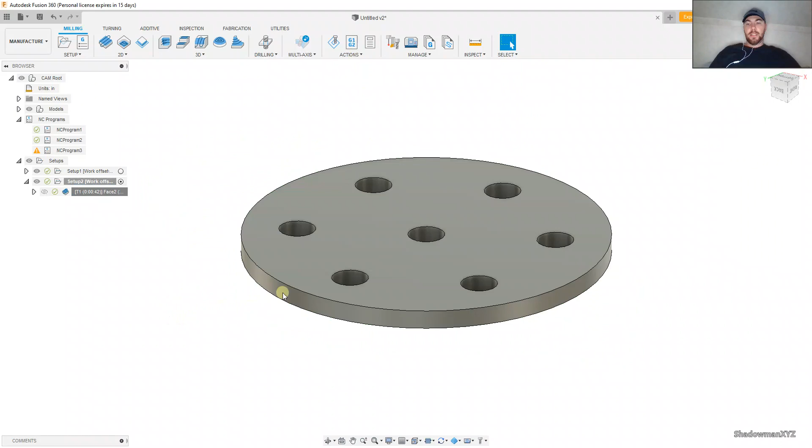Simulate. Slow it down. Take a watchful eye. Make sure it ain't doing nothing crazy. Look at that. It's coming over, so it's going to fully clean up. Let's go ahead and take it down. Okay, so looking great. That part is done. Hit close, and then you're gonna right click, and then you're gonna post that process, or you can go up here and post it.

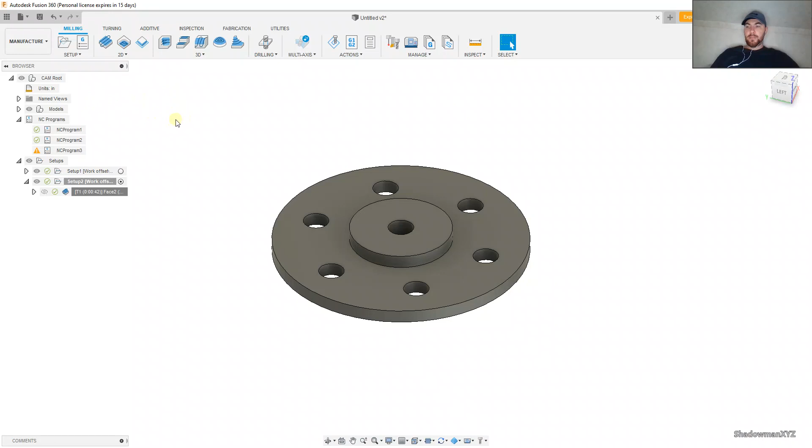And that, my friend, is how you machine the basics in CNC mills. The things that they have to offer, just simple little things. We did a facing operation, a contour, a pocket, we did some drilling. There's so many more things you can do. If I wanted to 3D print this part, I'll do that in the next video. That's in utilities, set up your printer and all that stuff. But I'm going to wrap this video up. I hope this gave you the basic understanding of how CNC mill operations work within Fusion 360.